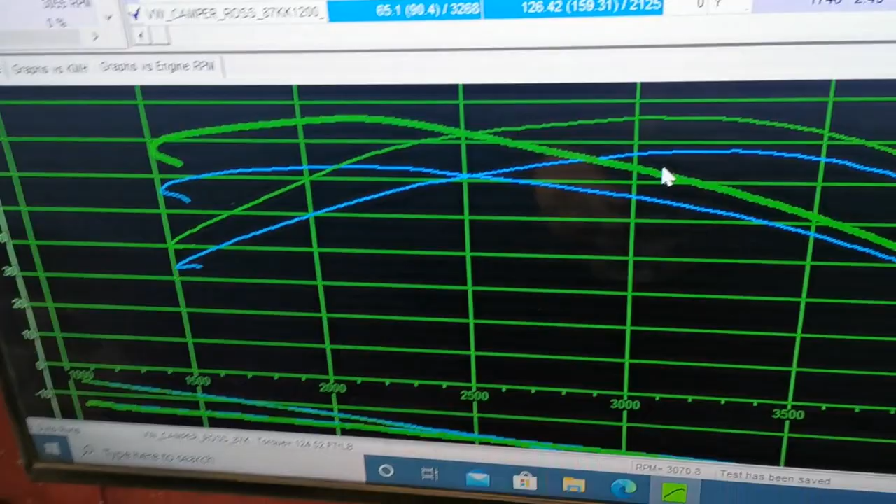Let's have a look at the screen. Okay, so definitely there's big increases here, just having done the hammer mod and gone through everything on the VCDS. So I have an extra 26.6 foot-pounds of torque, and it's about 5 or 6 horsepower, but to be honest with you, I'm not so much bothered about the horsepower. It's more the torque that I'm actually interested in here, especially pulling around a heavy van. So definitely it's going to make the van an awful lot more drivable now, actually having this power.

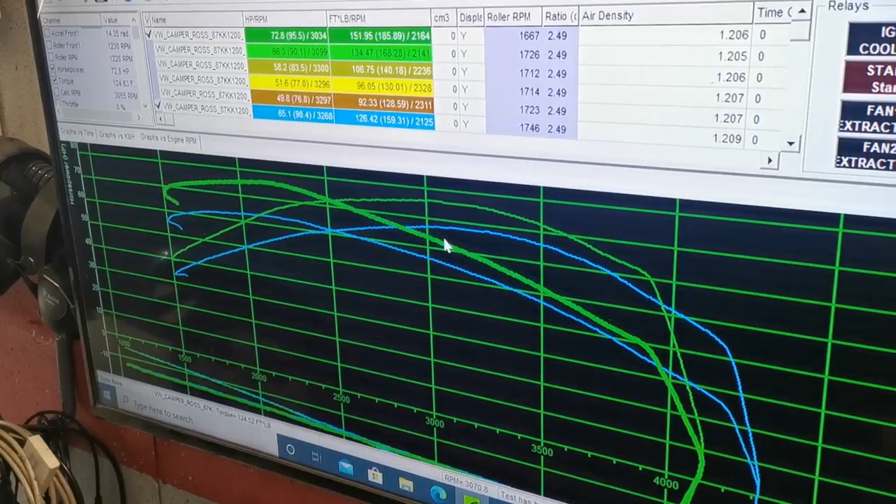So we're going to give it another run now, and we're going to make sure that the turbo is not roasting the arse off itself, because there's no point in having this extra power and finding that the extra EGT of burning the extra fuel is going to cause the turbo to burn out, because ain't nobody got time for that. The cooling fans are noisier than the van.

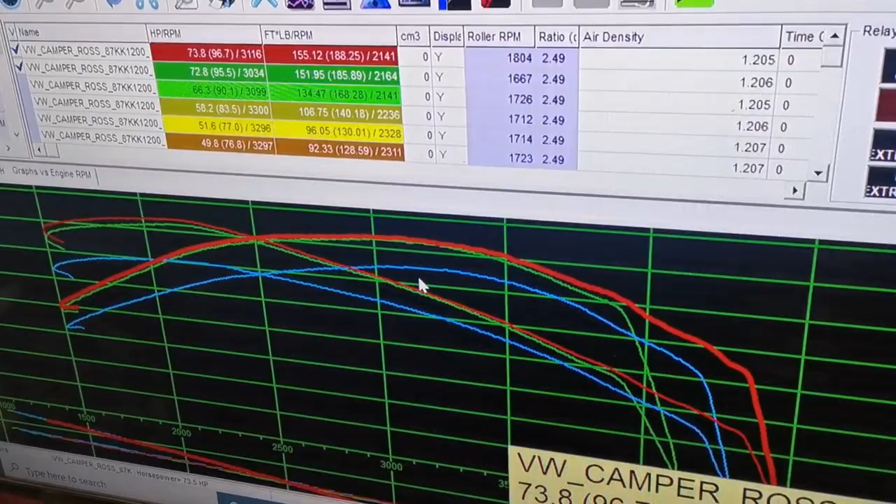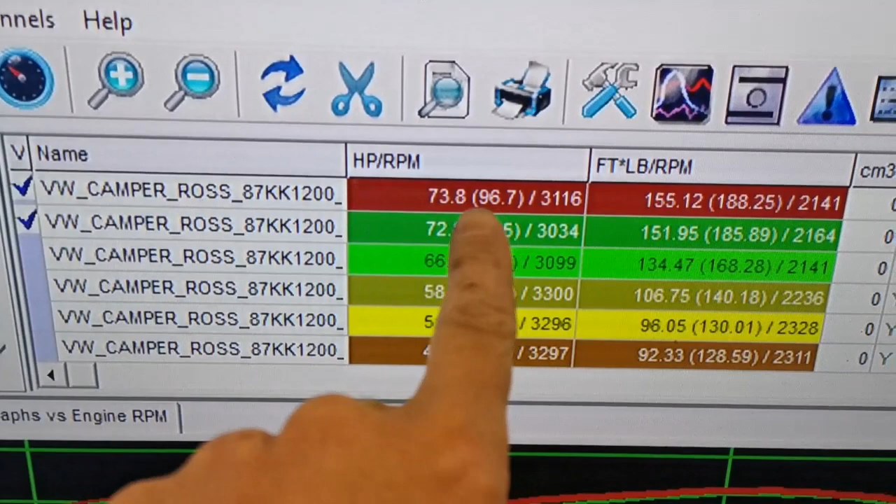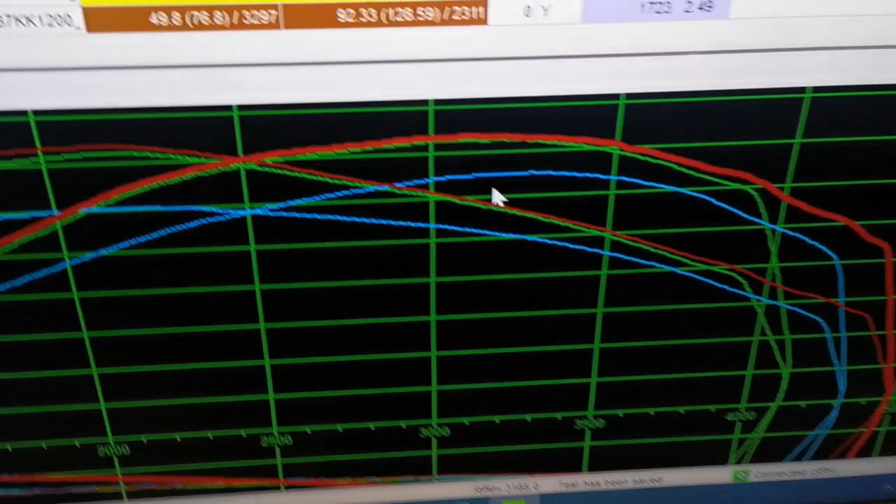More again. So that's your wheel horsepower, and that's your flywheel horsepower. So 96.7 with a torque figure of 155 foot-pounds. That should make it a very nice yoke to drive. So I'm looking forward to taking it out for a spin now after all this and seeing how we get on.

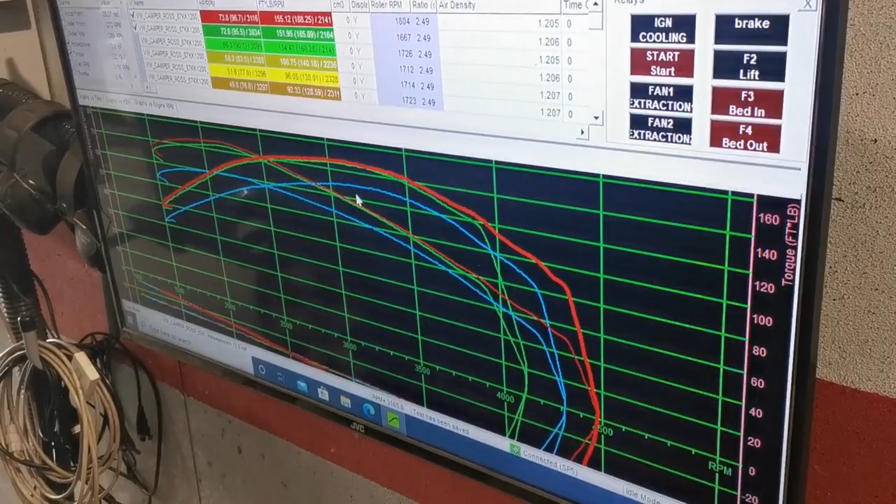Okay folks, I'm on the way home and I am a happy man because the van is driving absolutely beautifully. It's got the power it needs. That extra torque has made such a difference to how it performs and just drivability. I'm not having to bury the throttle all the time. The only thing is that on idle it's a little bit lumpy at times, but to be honest with you, I'd live with it.

And the thing about it is that now I'm in 5th gear at 60, and I'm only having to touch the accelerator to keep it moving. Whereas before, driving it, I had to bury the accelerator all the time to keep it moving. The engine wasn't powerful enough for the van it was in, whereas now it is. And I may have a look in the future at getting the ECU remapped and try and get that 110 horsepower map put onto it. Yeah, so there should be a bit more to it there.

I suppose I was a little bit disappointed when I saw on the dyno that it was actually producing the 90 horsepower there or thereabouts. So I was kind of thinking to myself, right, okay, so there's nothing wrong with the engine, and I should be happy about that, you know, insofar as the engine's actually in good order, and that's great, but it means it's just slow. So now we have to look at alternatives.

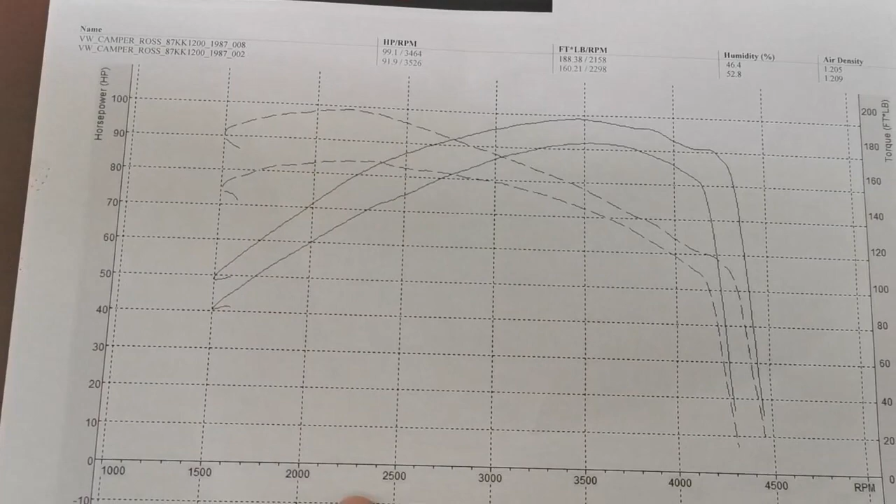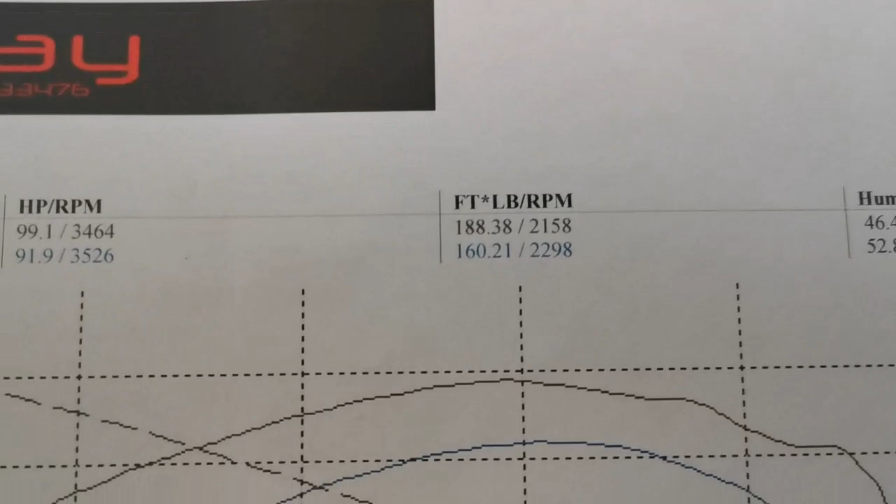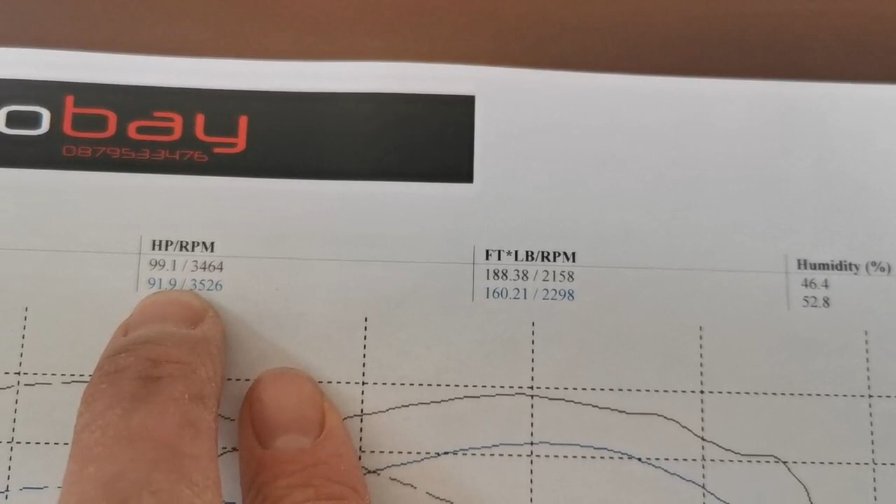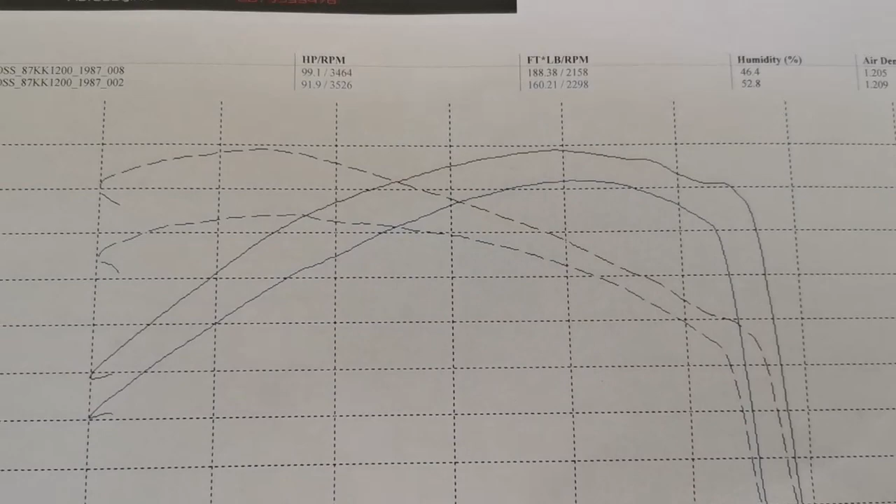So the maximum torque really is occurring at about 2,250, which is really where you want it on something like this. And we are up quite significantly on the maximum torque figure. So these are the maximums here now. We start out with 160 foot-pounds, and we're up to 188. So that's 28 foot-pounds of torque increase on that. And here is our horsepower reading. So we're just shy of the 100 horsepower mark, which coincidentally enough is pretty much exactly what I was getting for the 1914 Beetle engine that I had before I reworked it. So yeah, there you go now. Definitely a hell of a lot more torque.

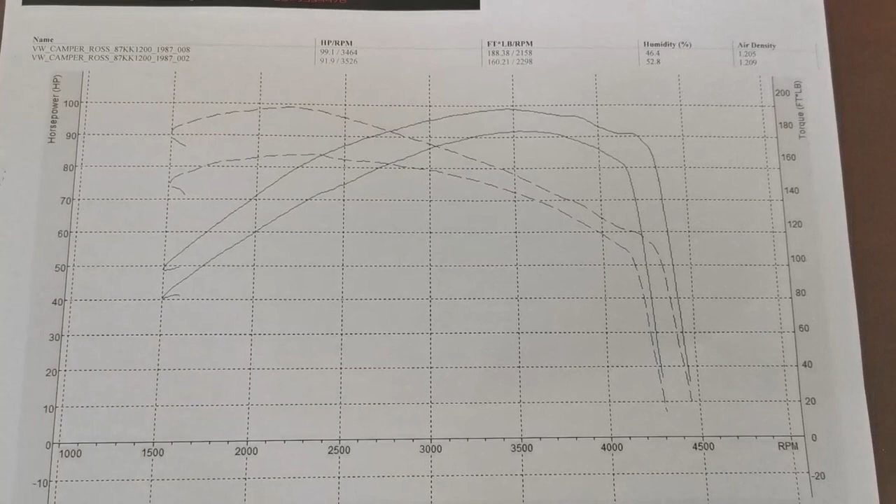To be honest with you, it is an awful lot better to drive, and it does definitely make a difference. The only concern I have now is the fact that it doesn't idle as cleanly as it used to. I think that's going to be just something I'll have to live with. There's a little bit more smoke as well, but really that's under full acceleration. And again, I'm just going to have to live with that. Beyond that, I'm into kind of remapping the ECU and all that, which may be on the cards. I may well think about that in the future. I'm just going to have to live with it for a little while and see.

But it was good to know that the engine was actually in good order before we even started. If it turned out the engine had low compression or something, I would have had to reevaluate the situation. So anyway, I'm going to leave it at that for the moment, and hopefully this will be the end of it, and I will be able to live with it the way it is now. Certainly it was a much better machine to drive back, and unfortunately I got stuck behind every bleeding slow driver in Meath, but such is life. I kind of would have liked to have gotten into fifth gear a bit more. Anyway, look, we'll know in the fullness of time.